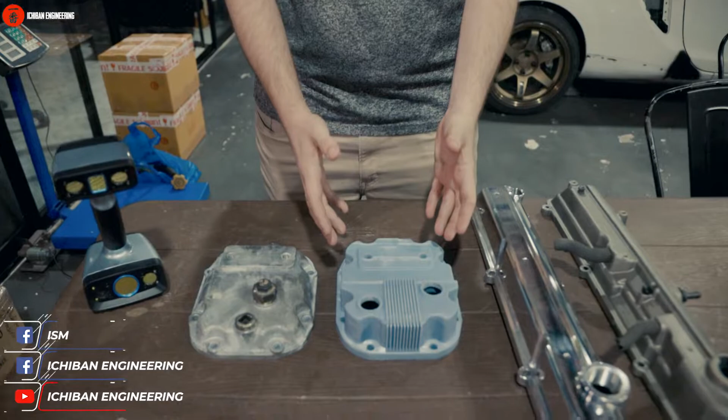Hey everyone, it's Ethan again from Ichiban Engineering and ISM here, and today we're going to talk about our new product for the STI. It's basically a diff cover. This is a 3D print as an example, and how we model this. I'll also show you a time lapse of how I model it online, how we scan this, and from the OEM part to the modified one here.

That's the OEM STI diff cover, and this is the modified unit. Generally speaking, we start by 3D scanning it. So 3D scan the piece, remodel it in the CAD software. We modify it to whatever we want to do. In this case, we enlarged the oil capacity. We made some fins here, all kinds of stuff.

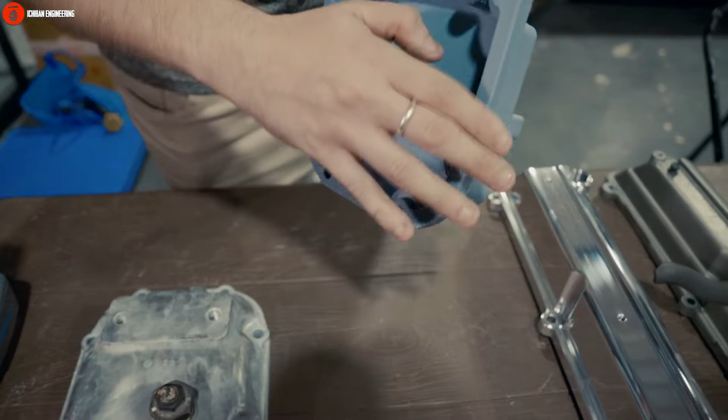These dots here are from the supports from the 3D print. We can sand it down and make it nicer, but this is just an example. It's a model, so we can test it on a car.

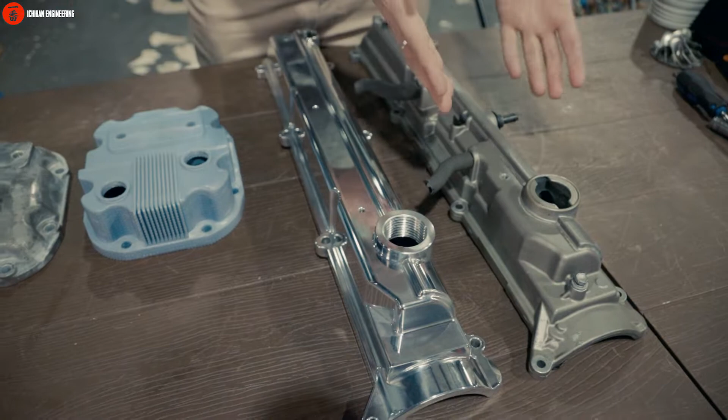Here on the left is just an example: we scanned this 2JZ VVTi valve cover. This is an OEM piece from Toyota, and this is the final part that we CNC machined. It's perfect. All the details are here, except the ones that we don't really need, like this here and the added port that we added. So yeah, and now I'm gonna show you in the computer how we go from this to this.

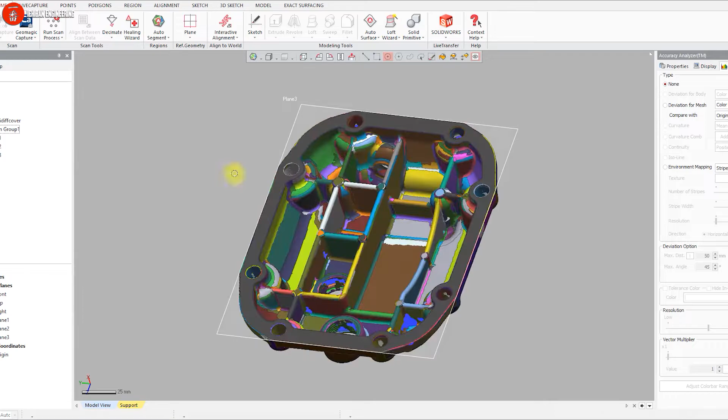So now we're basically gonna design the profile and extrude it first. It's gonna be in fast motion, so it's just gonna play through it and you're gonna watch it, have fun.

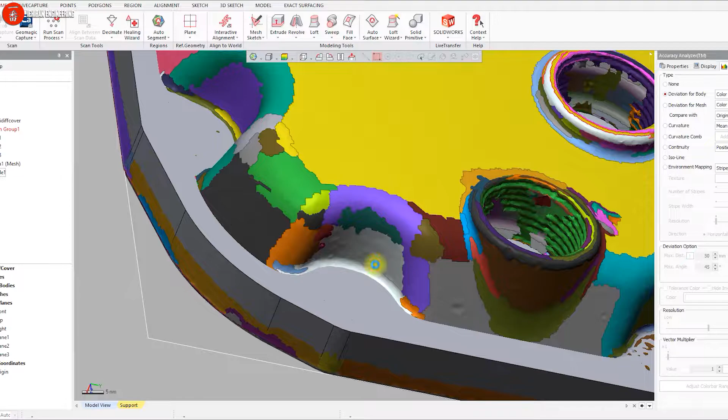So now after the first profile was done, we're doing the second profile. I'm gonna extrude it as well.

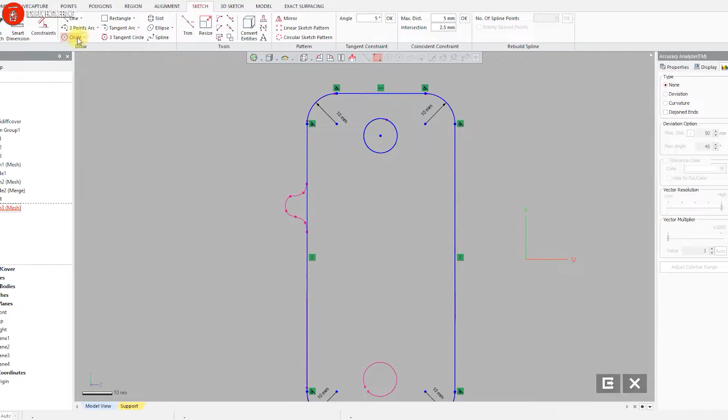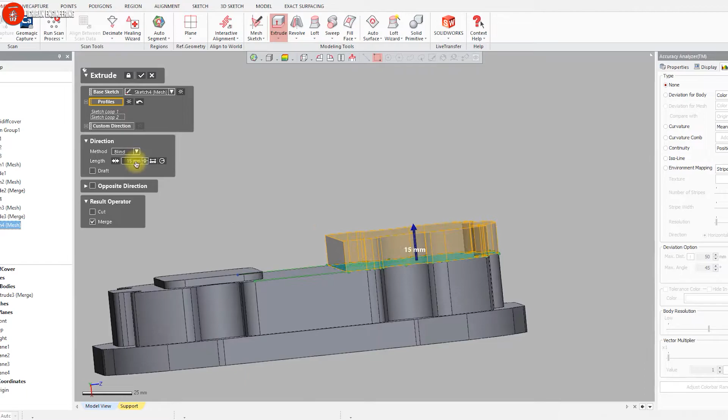So what we're doing here basically is we're enlarging the lower section of this diff cover and adding volume. We're doing so carefully, since it's going to be near the rear sway bar, so it has to be carefully done.

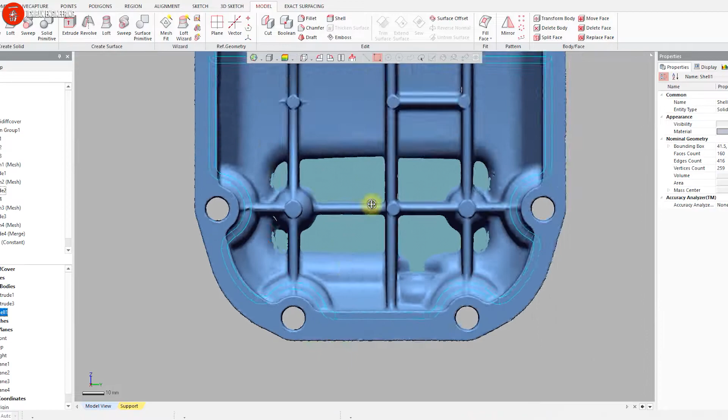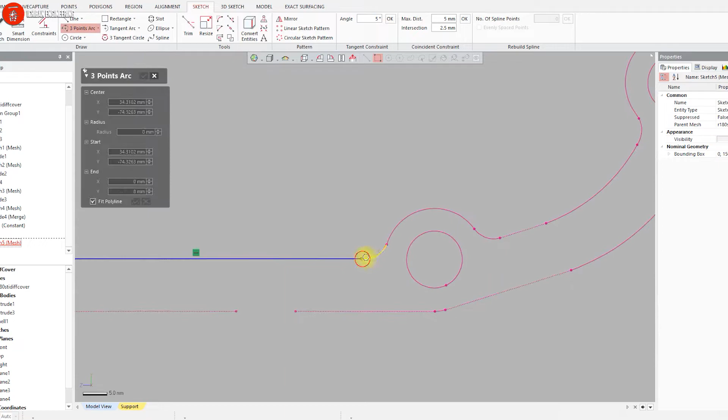We're now modeling the inside, and they first made this part back in the 90s without a CAD design. So there are steps inside, and we really want to mimic it. And so it's kind of an intricate part. It's going to be a long section, so enjoy watching, and basically again mimicking the steps and making the inside perfect.

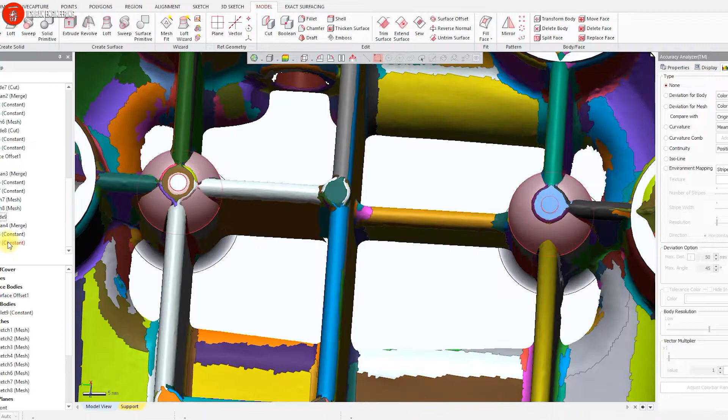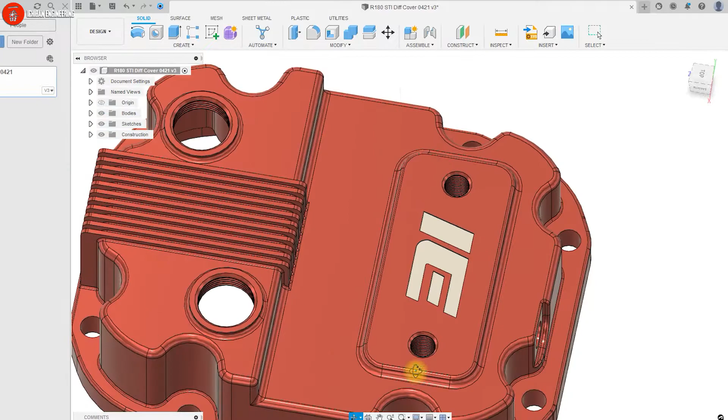So this is the final model. We put it in Fusion and put the logo, the threads here, the thread for the studs to mount it on the rear subframe. We also designed the bottom perfectly. This is the vent for the breather. It's gonna go from the inside to the outside. There is a flat space so it can sit tight.

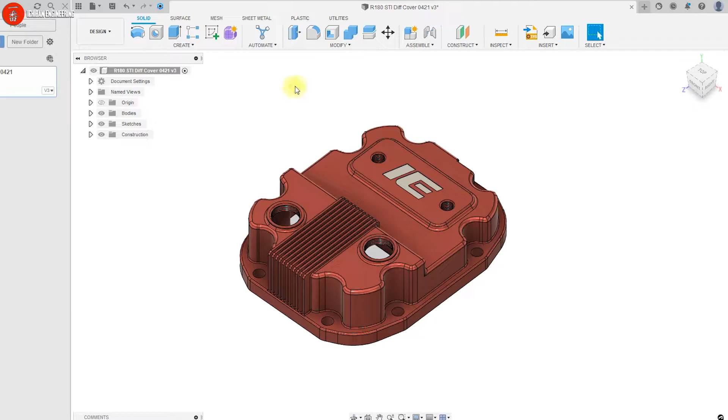And basically we're gonna render this now in KeyShot, which is a different software where we render products before going and printing them. We're gonna also print this part later, and you're gonna see it.

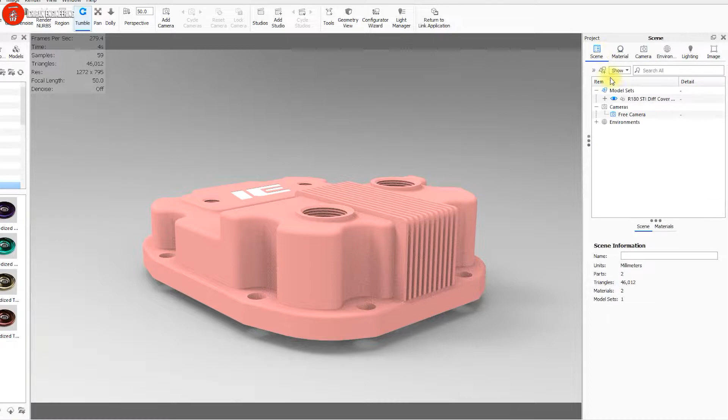In KeyShot we can choose materials. Here we're gonna make a collision so it sits on the floor, on the ground, and we can also choose basically if the GPU or the CPU is gonna render it. The GPU renders it much faster. Position it.

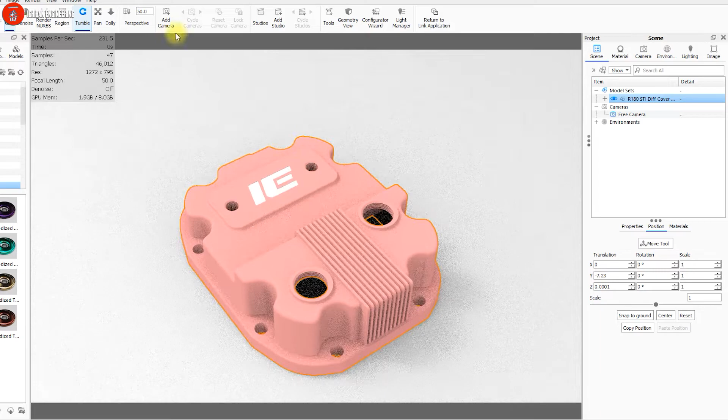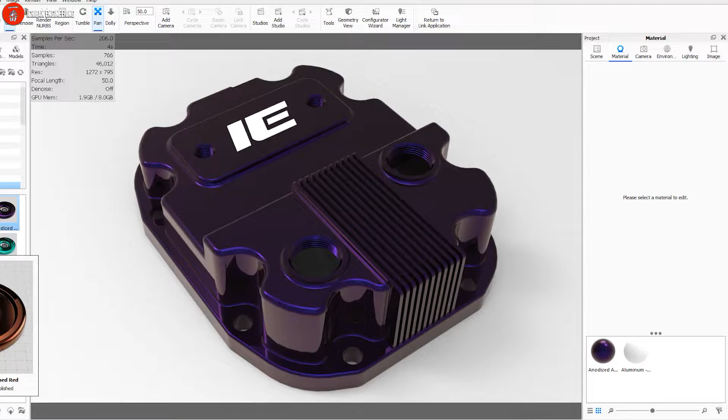I'm gonna choose the material, so the material for the housing, the whole diff cover, and the material for where the logo is. It's separated so we can mimic basically an engraved logo after the anodizing surface treatment.

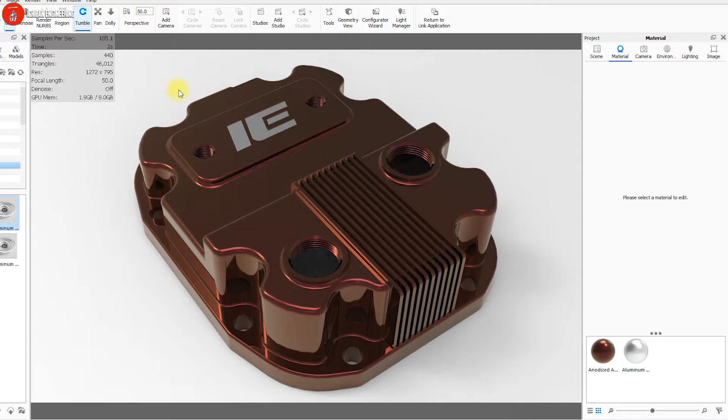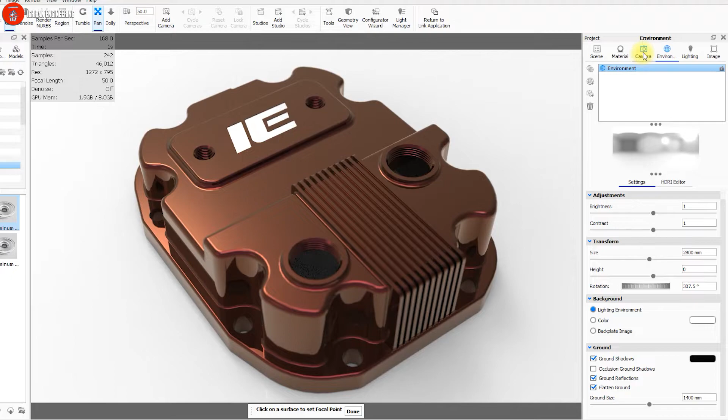So here we can also choose the depth of field for the camera, really mimic a realistic rendering of a product, and it's all rendered in real time. We can also do a non-real time render, which basically exports the image that we want. And yeah, that's basically it. So that was how we designed this whole thing.